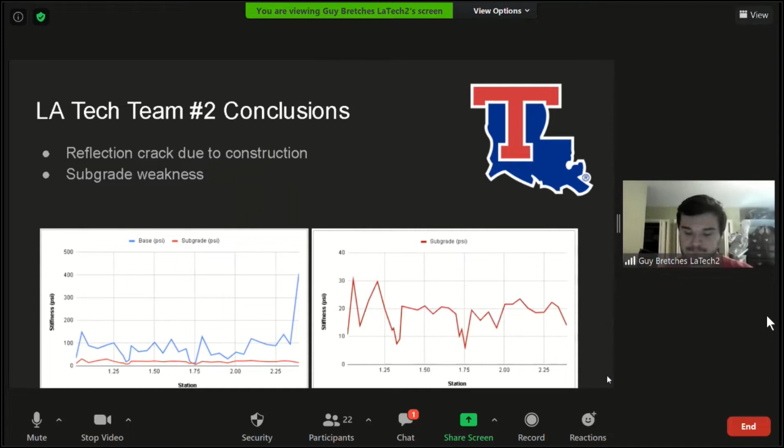Okay, Chuck Fuller, I think you've got a question. Whoops. That's not going to work. There you go.

All right, Guy, you guys did a great job on utilizing all the information that was given to you, and then also the graphs on temperatures and on rainfall. You went out to outside resources and pulled those graphs together, and you're looking at outside resources to support your conclusion. I take my hat off. Going out to outside resources and utilizing those graphs, you and your team did a great job with that.

My question for you or your team is, what information, if any, do you think you should have had added, changed, or subtracted to support your findings? I don't know if necessarily I would say added, but perhaps changed. As a team, and this may have just been us, one of our biggest stumbling blocks was in the actual wording of, I believe it was the second or third slide of the presented information.

It was the description for the actual construction process, discussing the change order, discussing what went where. Honestly, it may have been more useful just to have more actual diagrams or more description. And once again, that may have just been a particular problem with the thinking of our team. We very much liked to see the graphs, see the data directly, and this sort of description kind of stumbled us up a bit in our mental image.

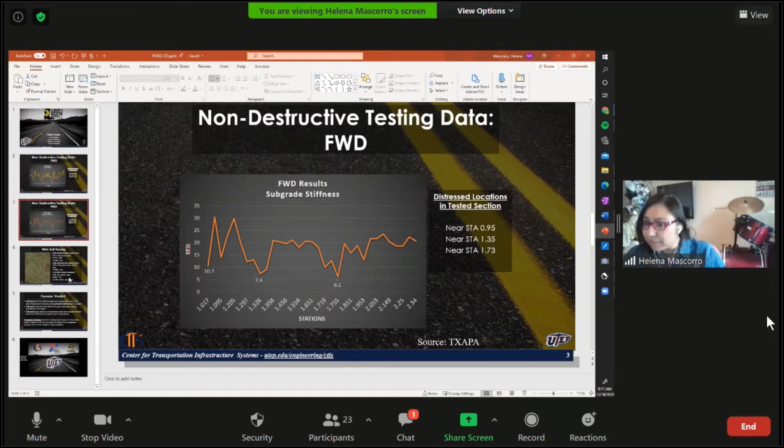So as my previous comrade also showed, these points show the different stiffnesses of the base as well as the subgrade. And the low points match the stations of the distress locations, which is not a coincidence. So in order to provide more information on what's going on, we did further research by looking for information on the USDA Web Soil Survey. With this, we analyzed the soil, and what did we find? We found clay underneath the main sections of the soil.

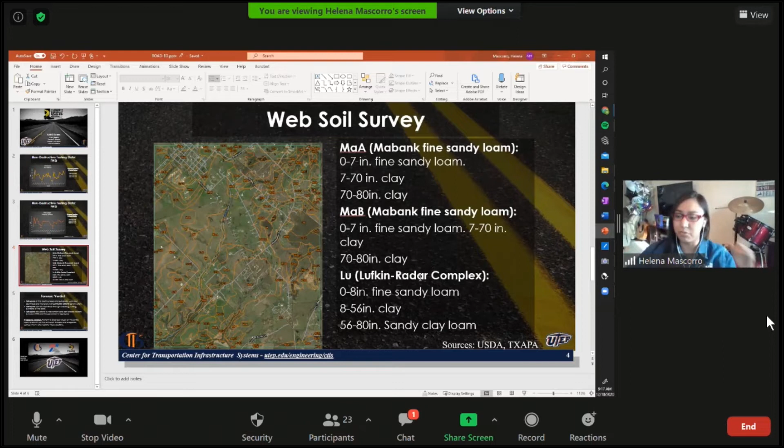So we have Mabank fine sandy loam, and then in the bottom we have clay, Mabank fine sandy loam for the second part, and then in the bottom we also have clay. And then we have Lufkin radar complex, and these three form part of the road and also have clay. So in the end, to give a name to the problem: soft spots. What we think is that the soft spots in the existing base and subgrade at these locations were not properly identified before construction.

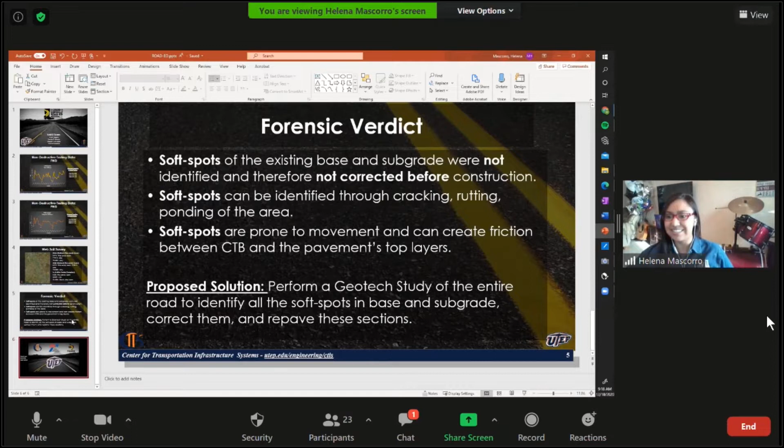And in order to identify what's happening right now, these can be found through cracking, which is our problem, rutting, ponding areas, and soft spots are also prone to movement and can create friction between the CTB, which is what we have, and the pavement layers. So our biggest problem is soft spots not being identified properly. And that is what we came up with. And we want to thank everyone and all of our sources, TxDOT, and the university for providing us with this opportunity to be here.

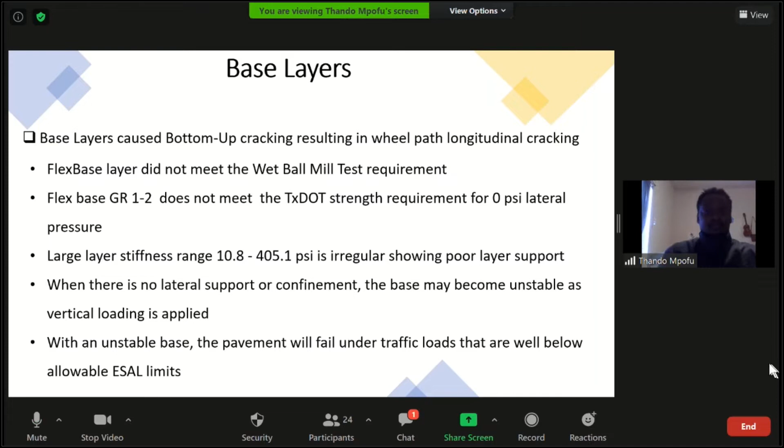Time out. Hurry up. All right, very good, very good, very good. Michael Lee, I think you might have a question. Thando, if you could go ahead and drop your screen out. Michael Lee, let you give a question.

Okay. Thank you, Thando. Really good job that your team did. I'm looking back at my notes in y'all's original presentation, how y'all broke it down. Y'all did an excellent job. One question that just remains with me is, as you know, this project was let with a totally different pavement design than what was actually constructed. The pavement design was altered by a change order. And so I continue to ask, what are your thoughts about that change order and the impacts it had to the final quality of the project?

By using the 7 inches of rework and 4 inches of flex base, this might have created a vertical interface widening. But then looking at where the joint occurred, if there was any vertical interface widening, the crack should have occurred closer to the joint, but this was not an issue as the crack occurred in the wheel path. So by issuing the change order, this may have affected the stability of the subgrade, as it was shown in the cross-section view that there was about 4.5 feet expansion in the subgrade. Thank you. Appreciate y'all.

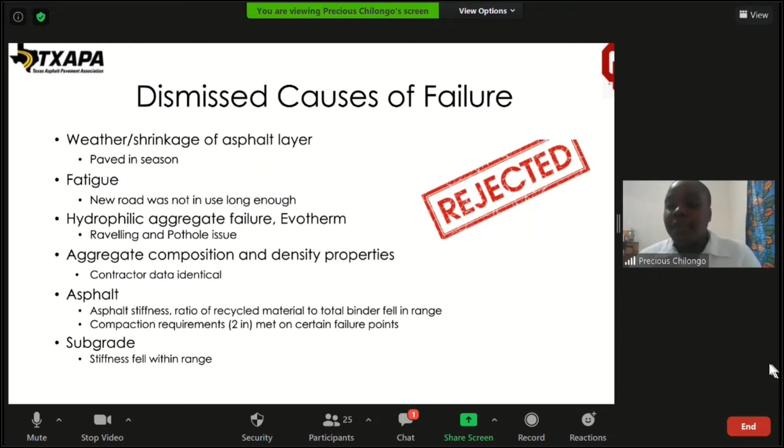And some of the compaction requirements in our failure points also met the 2-inch minimum, which meant it had to be a bigger problem. On one hand, our subgrade stiffness also fell within range. And dismissing all these causes left us looking at bottom-up cracking, which meant that it had to be a structural issue. And when we looked at our base stiffness in the failure points, it was low from the FWD results, below the recommended 80 KSI.

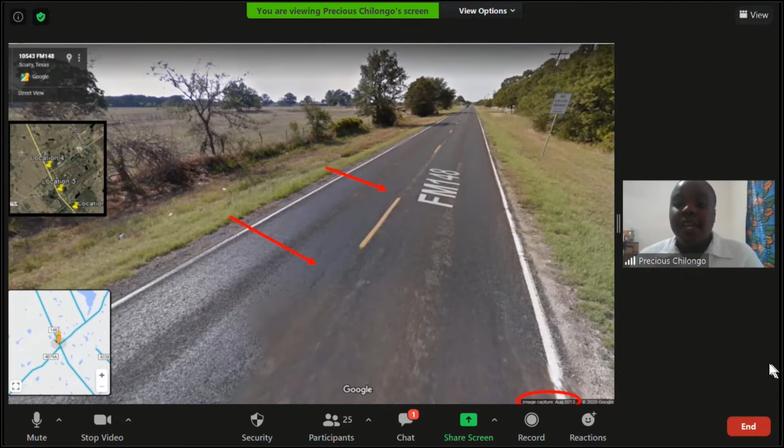And we also thought that would be because of the reused pavement, the base that contributed to the low base stiffness. And our theory was that underlying failures in the sub-base, which was not reworked along the wheel path, propagated upwards in the weak base to the top, which was also accelerated by the road in use. And when we looked at a previous image of the road, it showed the cracking and the failure in question, which further backed up our conclusion.

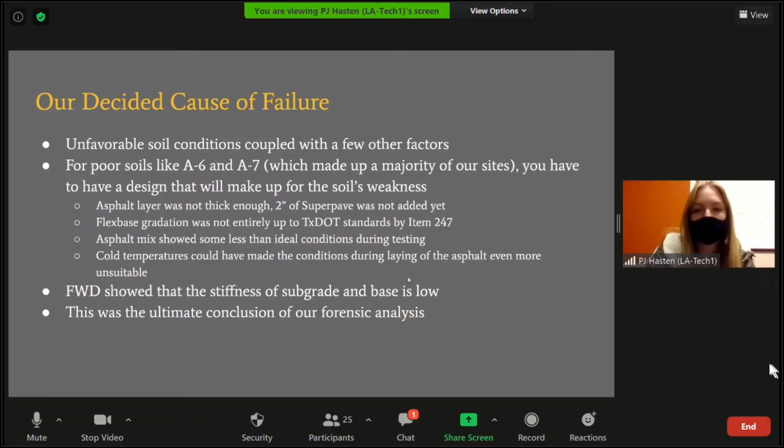So the main conclusion for your forensic investigation was mainly the soils. My question is, how much did the change order contribute to the problem? Or what was your thought process while reviewing that change order? Our team did look at the change order. We really didn't see anything that would have affected it negatively a lot. Honestly, we would need to do more research to have a more concrete answer for you on the change order.

Thank you, PJ. Thank you. All right, excellent. Hey, Harold, what do you think so far? Pretty good, Jim. It looks exciting, some great information being shared, and you can certainly tell that these engineering students have done their homework. They've done a great job. They've been working on this for over a month now, so they have really got a lot of good information being shared. I'm enjoying hearing them.

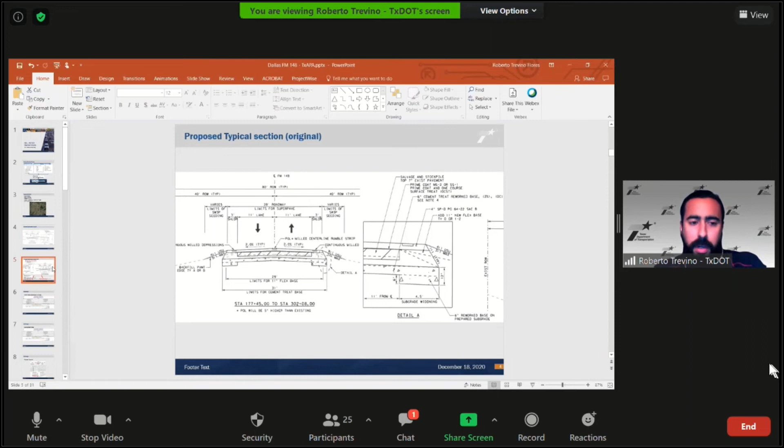You are all familiar with the details of the location, but the main thing we looked at, just like you did, is the change order. We looked at what was originally proposed and what happened next, and we feel that reusing that 7 inches of the existing material could have contributed to some of this problem. Also, once you remove the 7 inches of material, we don't know how much is left. They could have been treating mostly subgrade. Most of you noted that there's some clay down there.

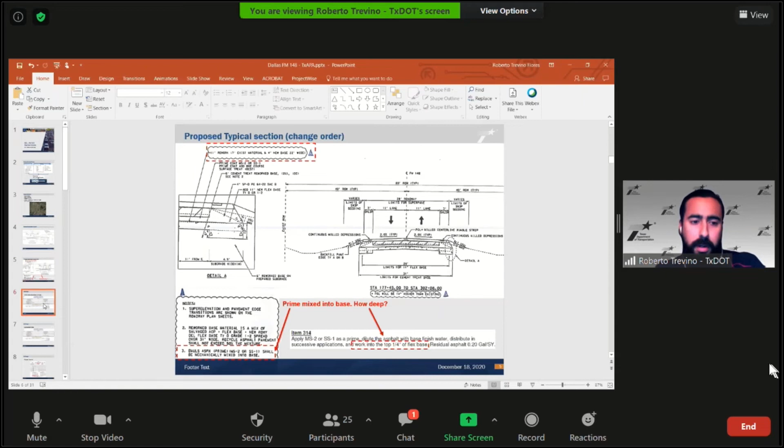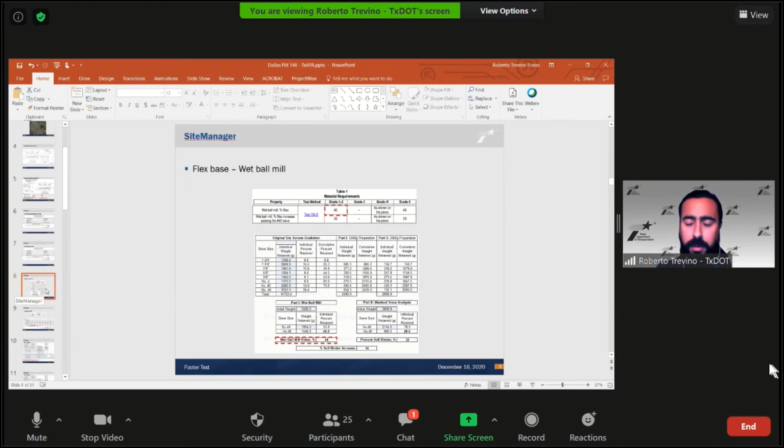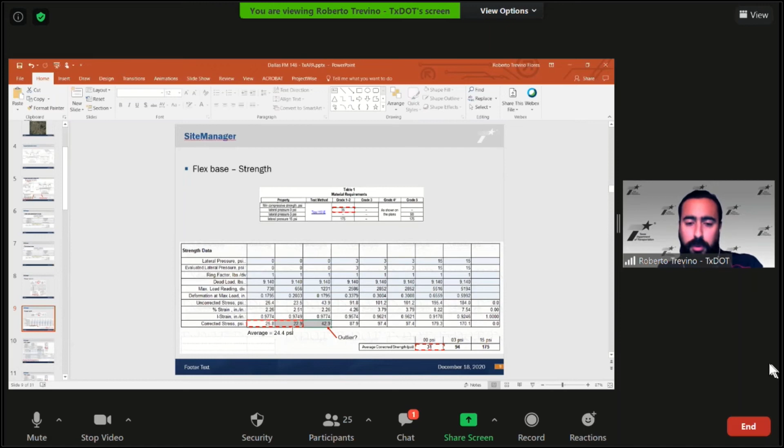We did check the thicknesses of the pavement layers. They all checked out: 6 inches of treated material at the bottom, 11 inches of total pavement. But we also noticed what y'all did. The wet ball did not meet specifications. The unconfined strength of the base did not meet specifications. This average is a result of 3 numbers, and we feel one might have been an outlier. If you take the 2 that are closer to each other, the average unconfined strength is closer to 24 psi, which is much lower than the 35 required.

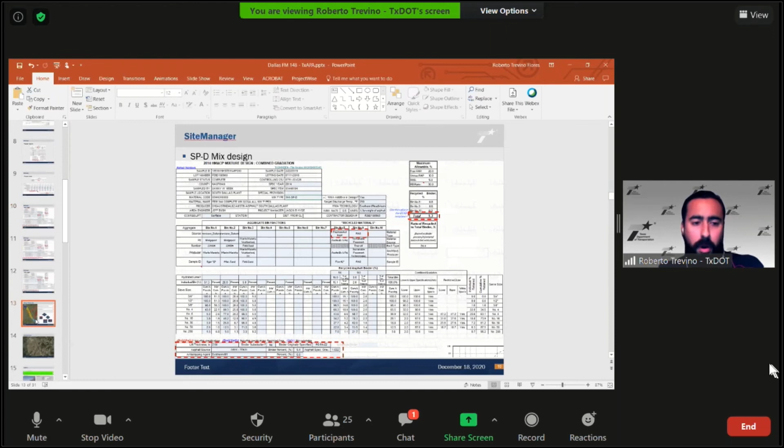Similar comments on the mix design. We don't know how much this contributed, but we also noted there's RAP and RAS. There's a high recycled binder ratio. We noted that there's an anti-stripping agent. We don't know the actual available binder. Moving on, we also looked at the soil maps. We noted that there's some high PI material, and lime could have been a better strategy. It was treating mainly subgrade.

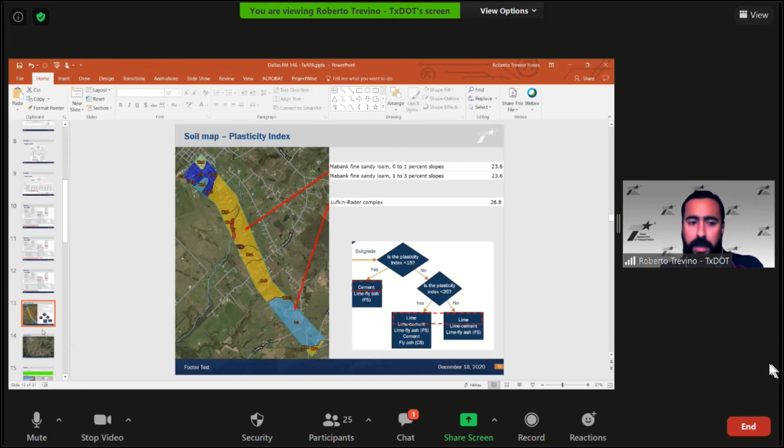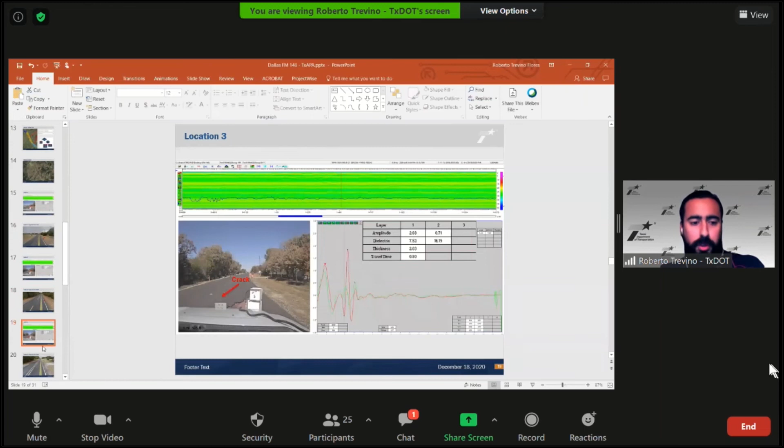Looking at the location of the distresses, we used GPR to map those cracks, and as y'all did as well, we went back and looked at the Google Earth images, and we noticed that those cracks were there already. So there were failures that were not addressed during construction. At all those locations where the cracks reflected through the pavement, they were there already.

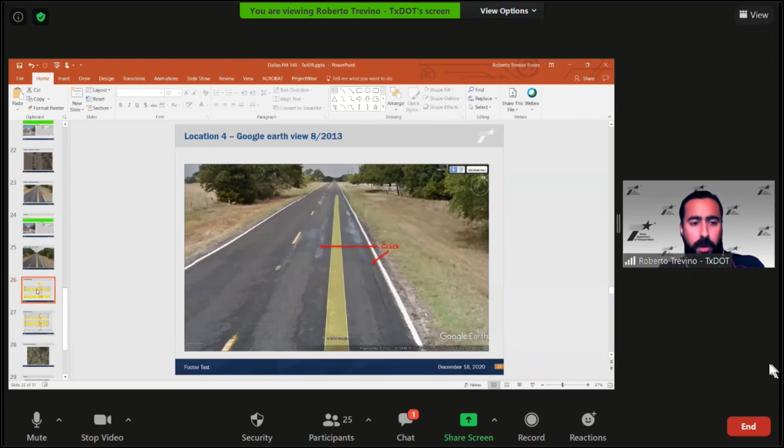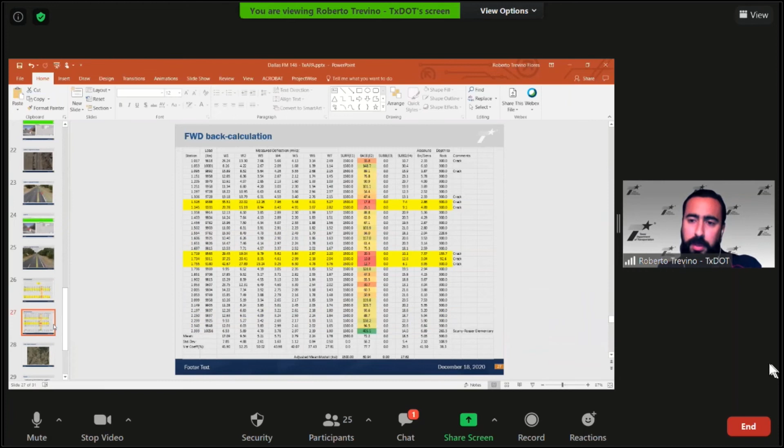Moving on to the FWD, we also did an overlay of the cracks, and we noticed that there was weaker base as well as subgrade at those locations. So there were definitely some problems there. And our FWD units give us the GPS coordinates, and we're able to map these for the TxDOT area office to evaluate a little further.

So in summary, those locations showing the distresses already had distresses before construction. The modulus was low. It appears that the cement treatment was not successful in providing good support in that subbase. The failing test results of the base, reusing the existing material via change order, and the use of RAP and RAS and low effective binder may have been contributing to the failures.

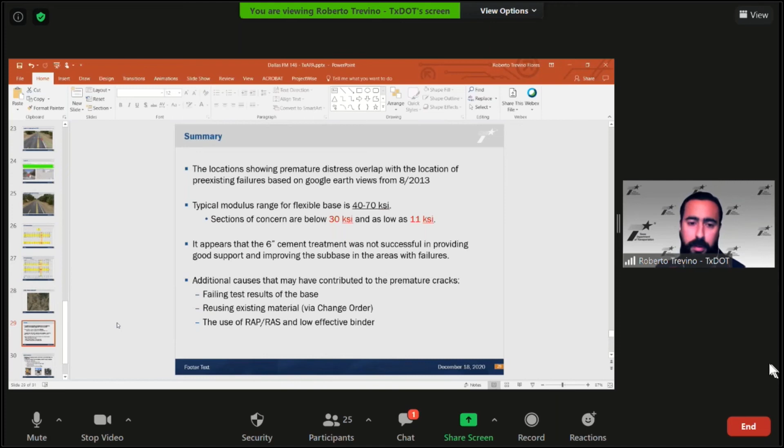We did ask if we could do additional sampling to dig deeper into the cause, but in the end, because of time constraints, the contractor and TxDOT partnered to come up with 2 solutions. First, for the minor cracks that were just in the asphalt layer, the contractor applied crack seal over them before placing the final lift. For the deeper, more severe ones, the contractor remixed the 2 inches of existing hot mix and treated with cement to reshape back an 11-inch layer, then put the 2 inches back, and then the final lift. These are our conclusions.